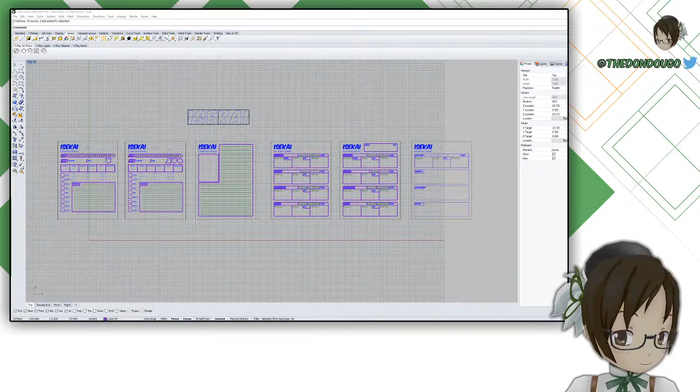So today, what we're doing - first of all, when you saw the title, VTuber redesigns a character sheet, you might not have thought that we're going to be in 3D modeling software, but that's what we're going to be working in today. I'm back in Rhino 5.

If I was doing this any other way, it would probably be in Adobe Illustrator, because that's really good at doing line work. But the program I know best is Rhino.

The sheet that we're working on today is for an RPG called Isekai RPG. It's one I've been working on for a while. We got this nice character sheet so far, but this thing hasn't been touched in probably 6 months. I first made it towards the start of the pandemic when I was hopeful that people would be able to play this game in person. And it has been a hot minute since we've been able to do any RPGs in person.

But regardless, we still need to update this, because man, it's out of date. And actually, what might be cool to pull up is I have made...

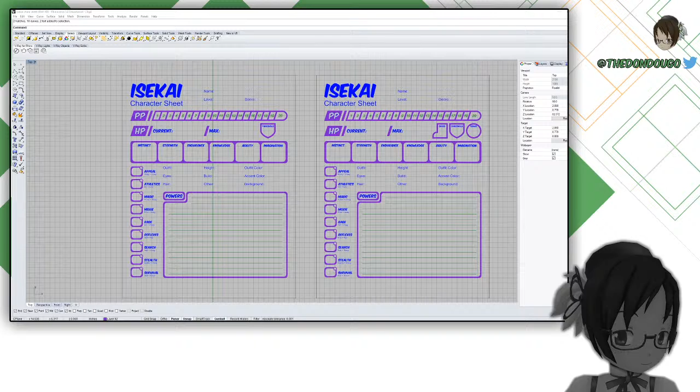Here it is, let's see, and I'll just move this over here. There we go, took some time to load. But here is the actual character sheet as it exists now as a Google Sheet. This is very up-to-date, because it's super easy for me to continuously iterate on this.

So we got this, gonna flip back to Rhino. However, the nice thing about this sheet is, well, first of all, it looks a lot nicer because I've been able to do things kind of however I want. It's just existing on a piece of paper, so I can organize that however I want to. But on this version, you might notice this is a spreadsheet. And I like spreadsheets, like anyone else likes a spreadsheet, probably even more, because for some reason I really like spreadsheets. But that's beside the point.

It's a little derpy because everything has to fit in boxes. We don't have really nice curves, and things can't be placed wherever I want them to be, because at the end of the day, this box here, it's gonna have to line up with everything else I want on the same row and the same column.

So that's what we're doing today. I think some of the big changes are, since we have originally designed this character sheet, we have added a few more systems. One thing that is nice to keep track of in your health is the amount of wounds that you're at.

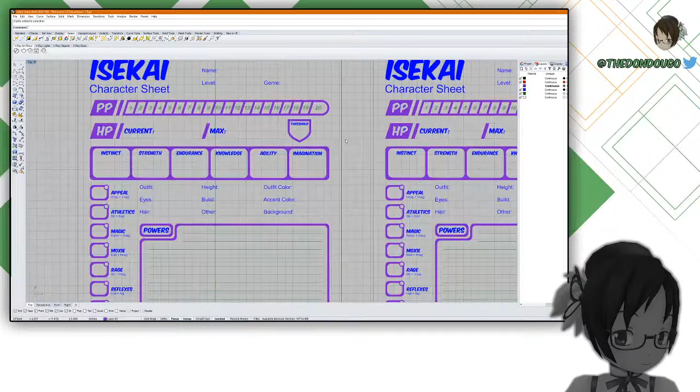Where it's like this solid purple is where it prints out a little more like dark gray. No, I think it's the other way around. Where it's purple, it prints out black, and then where it's blue, it prints with a dark gray. Although, I don't know, it could be the other way around. And then where we have our lines, we also have just a dark gray, so that there's not just black and white - there's a little more depth to this whole thing.

Okay, this is also old because it doesn't have the speed and threshold values. This whole back sheet is just a bunch of lines. The inventory sheet's all fine, honestly. I think all we have to do is mess with our primary sheets here, because these are the ones you generally look for all of your main character reference stuff.

This other sheet on the right, let's see, is this picking up my cursor? Okay, let's make sure that this shows my cursor real quick. Oh, it should. Okay, cool. It says it shows my cursor, so I trust it.

The sheet on the right here is just extra space for if you run out of space on the main sheet, because the whole system is built on this pick-what-you-want system of powers. So there's a lot of things you can take, and it's helpful to have room for that.

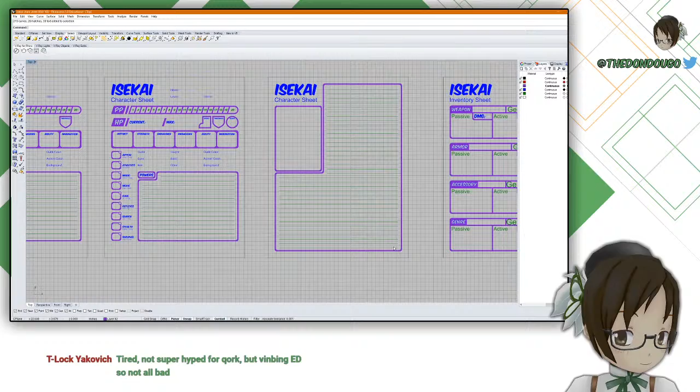Cool, alright. Tired? Not super... Yeah, I saw you're on Elite Dangerous. Sounds like a good time. Alright.

And then, let's see, what day is it today? It's Wednesday already, wow. I guess this is my third stream of this week of streams. So tomorrow's Elite Dangerous, isn't it?

Okay, so let's see, I'm going to make some quick notes of what we need for each sheet. First of all, with this sheet, all this out, we don't need that anymore. Let's see, I'm going to pull up a text.

So for the sheet on the left, we need to add for background and at-level-1 powers. We also need to add wounds. Oh, that's very large. There's a command in Rhino where you can edit texts. Okay, that's just that. Well, we'll just swoop this on down, not that far. Yeah, there we go, that's for this sheet.

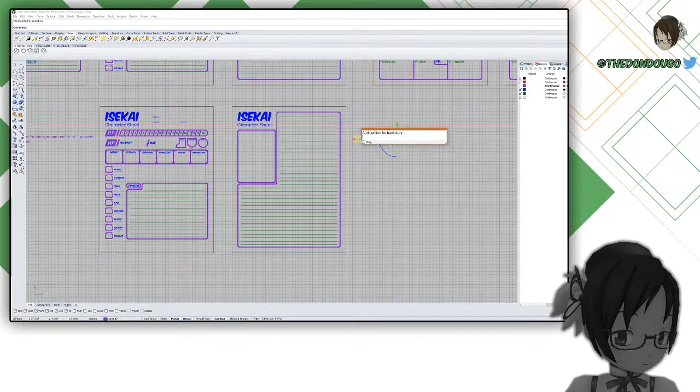And then on the right, I'm actually going to just copy and paste this text here. We're going to say we need to add a section for backstory. And we need to... what else was there? I think, honestly, that might have been it. I'll double check, let's see.

So if we go to the spreadsheet version of the sheet, what else do we not have? This has like different speeds. But my theory is that if you have this sheet here and you have a special speed, then you can also write it down next to here.

It might be nice having a small little notes section actually over here. I'm going to add this. Add a little notes section. And that's specifically for if you have a fly speed or maybe some other threshold power, it might be nice to have an extra section for that.

And then it might also be nice on this sheet, since it's the one where we have all our room for text. As an RPG player, I've often enjoyed having room to actually write down things that weren't necessarily my powers or everything I could do. So it might also be nice to add more room for writing. I'll just say add note space.

Okay, cool, so let's get cracking. First of all, this here's gonna need to shimmy around. The way I could see this going is for the backstory, I kind of want to put it up near the top area so it can take up space like that. But I don't know how much room I'll need to start with.

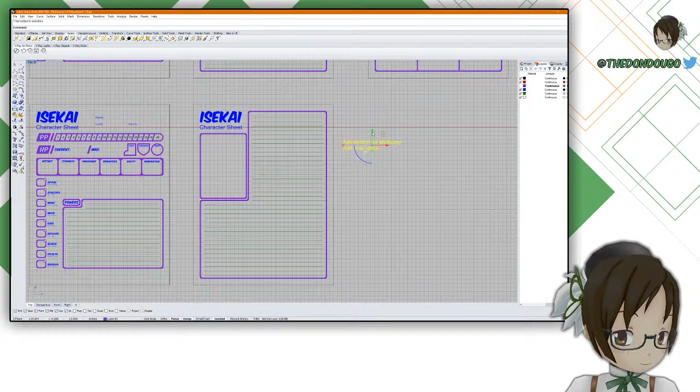Okay, so text. We're gonna just start with that, and then we're going to scale this down.

And then we're, of course, gonna need to space this out a lot. How's that? Considering that this is a standard sheet of paper, that's still pretty big. So we can shrink this down even more.

I guess if I really wanted to be consistent, I could take the size of one of these three things here and make that the size of the text, but these are still pretty large areas and this text is very dense. So we can make it a little extra small.

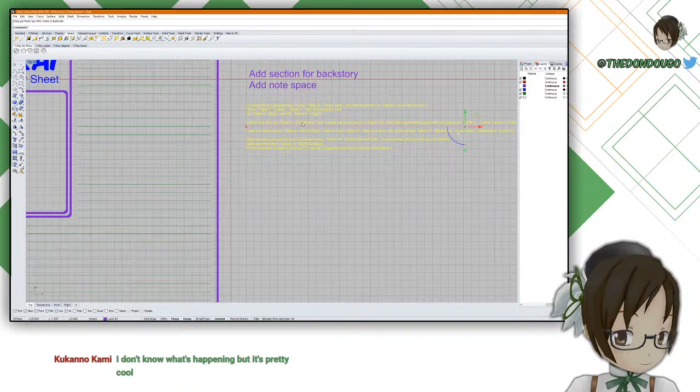Hey, Kukanno. Yeah, we're kind of 3D modeling, technically. We're in a 3D modeling workspace, and I'm working on a character sheet for a Tabletop RPG.

Oh, why does all this spacing look off? Okay, that's a place we'll have a line underneath. This whole thing looks strange. Let's see.

I think maybe I should try to assume... or rather, I should decide how wide I want to make this first. If we do that, then the backstory has a good amount of room to live in. The other thing is, we have a lot of areas where right now it just says Table 2 Colors or Table 5 Build. We want people to have room to write there.

So I think what I might do is... okay, we'll make sure that around each of these we have, let's say, 4 spaces on the right and left. Right now it's just 2. And then what we'll do is... actually...

Because my thought is, we have here on the sheet this little PP bar. It's a resource that you consume to use your powers and all that. Currently, we have these numbers, and they are in our lightest print color, like a light gray. So you can very easily mark over it, but you can still see it.

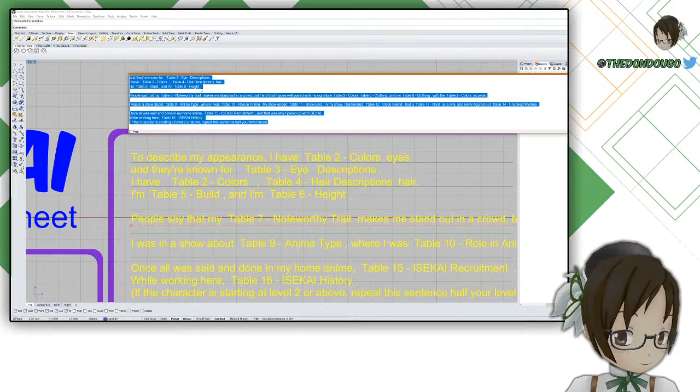Let me back up. So all this text right now is within the purple layer, which is technically layer 2. These are not named, they're just whatever, which is not the best way to do things, but it's how I'm doing it here. This whole thing is a single element within this layer—just a single text element that has all this text within it.

But if I want to have, say, Table 2 Colors as a different object, that needs a different color or different lightness, it needs to be on a completely different layer. So...

I think actually what I'll do is, if this is all black, then instead of having... I'll keep a placeholder for now, for every time we have one of those, because I think this will actually end up being a little more complicated than I want it to be. But that's how it is.

The other thing is there will be a line underneath. I think we could just build the underline into this. That makes a nice dark line if this is our black or dark gray. Yeah, okay, I'm a fan.

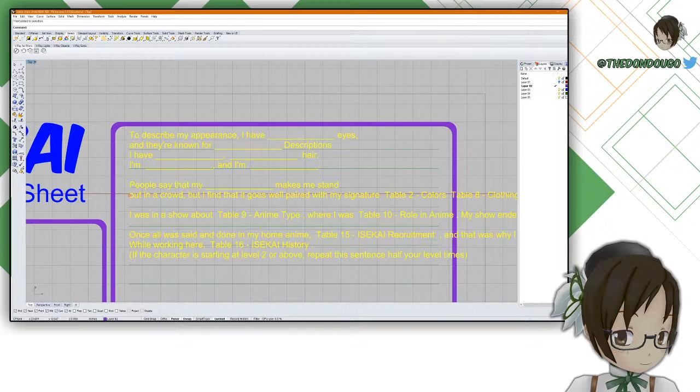And out in the crowd. Wait a second, and they're known for something... descriptions. I think that's not supposed to be there. Yeah, descriptions, so need to take that out. Oops.

My signature. Colors, 1, 2. Clothing. And my... blank. That's a good place to put a new line with the blank accents.

The funky part is also, I used a very specific offset for this and a very specific fillet wherever I had two lines that met, like all these corners are rounded. And I'm gonna need to figure out what those were, because I actually don't know the best way to find that.

I was in a show about blank, because this RPG is about going into other anime shows and fixing them, and you yourself are an anime character.

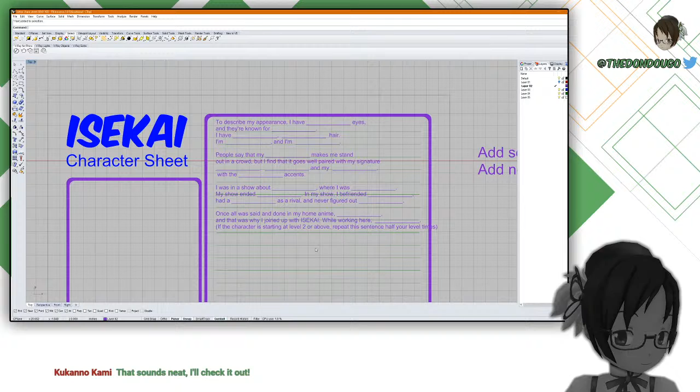Let's see, I know Dice Queen D, I think, was the person who started it. So if you can find her on Twitter, you could probably go back through the post and find a link.

The main thing is now this is taking up a lot of vertical space, so it might be better to put it down here below the little character portrait. At the same time, I feel like it's nicer to have a lot of horizontal space to write.

But yeah, in terms of sizing, that's just pretty small. And I feel like if we make this too much larger, then it'll just take up way more space than it should.

Design decisions, have to make design decisions. And that's not always fun.

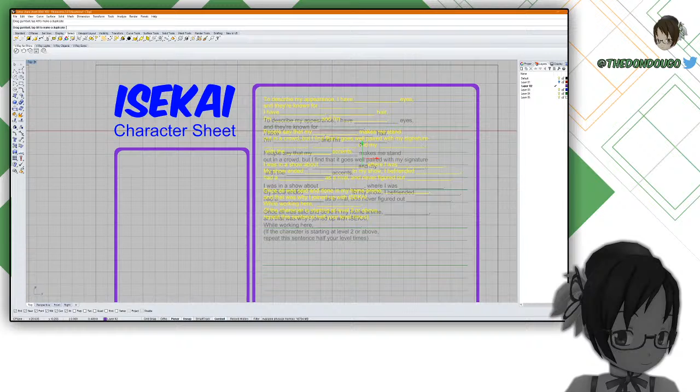Let's see, for now, we know that we want this to be on the... I want to say this wants to be on the purple layer. Guess we can always, like, we can actually always figure out what this will look like.

If you just use the print... no, I think I need to first zoom in on this dot, because Rhino, what it does when you hit print is it centers the thing to be printed out over your view in the program, which is okay sometimes. If we type in print, it should pull up this guy, and then the scale we set back to 1:1. We make sure that the width is 8.5.

Oh, I hit enter, I didn't want to do that. Let's try again. Print. Yeah, okay, so you can see that now the thing is centered. And then you hit output color to print color. Okay, yeah.

And then let's zoom this in. The only way I know how to do that is just by changing the scale. Yeah, so can't really get a good view on it because I'm not over it, but I can zoom out again and zoom back in on the text, and we can see that it is like the gray. Yeah.

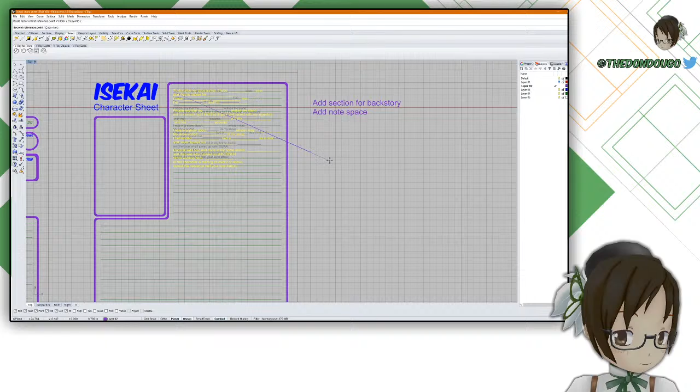It's a little like that. And then we're going to select all of these green lines, and I'm going to hide them for now.

If I really want to make this look a little nicer in the display to see what it might look like, I can go to my display options and set the background to white.

Although now some of the green lines get hidden behind the grid. I'm pretty sure I can actually turn off the grid. Let's see.

I just hide the command, because technically the clipping plane. Wait, clipping plane? No, it's something plane. Wow, it's been way too long since I actually did this.

Other option, just click it. You drag it off the grid. Wow, and that's what it looks like.

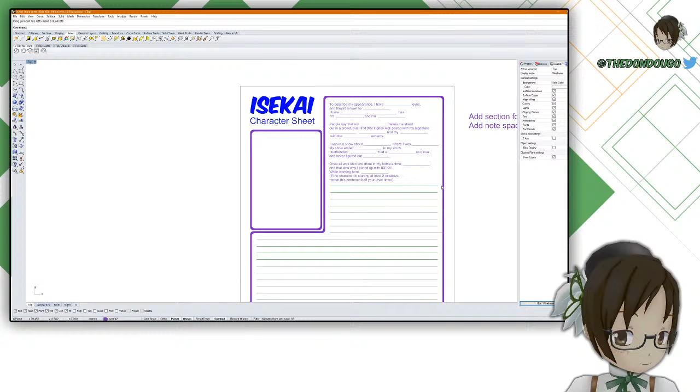Which isn't bad once we break this up into its own box. I think that'll work. We'll test that for now.

I'm also just going to move all of this off of the grid so we can see how things will look a little nicer, a little better.

I don't know why, but I cannot do words today.

Okay, so next thing, I have to figure out my spacing. First of all, for distance, going across there, 0.06 inches.

Okay, go to our purple. We're going to make a line. And we're going to figure out how much spacing we need above and below the text.

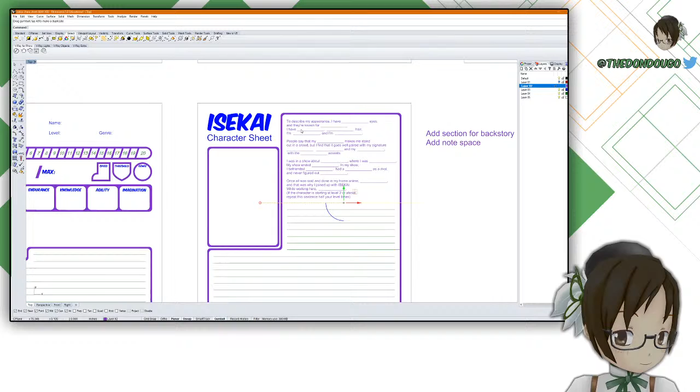We want it to be about symmetrical, and I think that this height above the text to the purple box line thing is the same height as one of these, because I put the text on one of those lines, and also just like looking at it, that looks all right.

And then we're going to offset the distance being 0.06 inches.

And then, yeah, you can see that these two thick lines compared to the white space in the middle, they're all the same width. And then with this here, the proportions are like square. If I drew a line from this corner to this corner, that would be a 45-degree angle.

So I know that that's what I'm trying to get. Now I copy this. What I'm gonna do is I'm gonna click there, and I want it to be...

Okay, I'm not gonna do it that way. I'm gonna make a line with a length of 0.06 inches. And then I'm gonna use that as a spacer for this here.

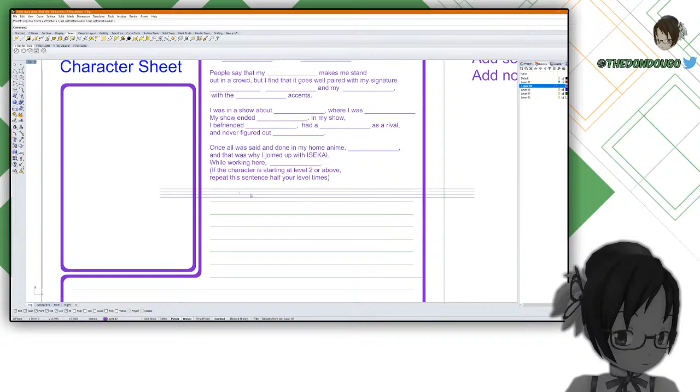So now we have a bunch of these purple lines that are all nice and spaced out. One thing is we have a lot of extra green curves. I'm going to delete this one too, so that there's a lot of headspace on this first line that you can write on.

Yeah, the next thing, so I think this here is a hatch, which is like a filled in area between curves. Unfortunately, I think... actually, no, we might not have to delete it. I'm going to delete it anyways because we're going to rebuild it later.

But we're going to break out our trim commands. So first of all, let me restart this. We're going to select all these.

So now every line that we've selected, when we have the trim command, if we click on something, it'll use these lines and trim out what I click on regarding the bounds. I've never had to think of how to explain the trim command. But basically, here, let's restart this.

I'm going to select this, trim. It's now going to use this line as a cutting object. So if I just select all these other lines, it will cut them off because they intersect this line. That's how we're going to explain the trim command.

You can also use it to select multiple objects, and then you can select the things that you've also selected with the trim command, and I can't really explain why, but it just works. So now we have nice clean edges.

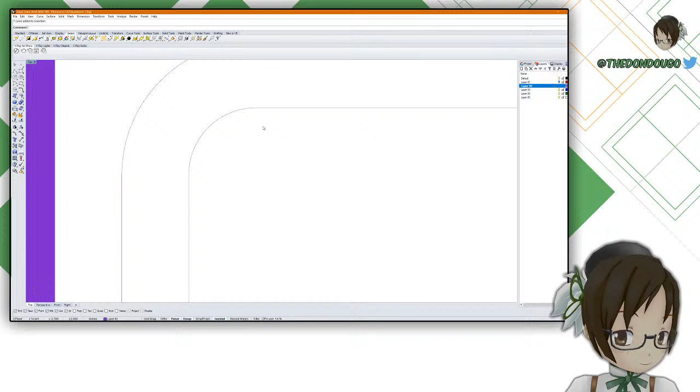The question is, do I want to actually redo every curve? Because on the other hand, there is kind of a charm to having the slightly thicker corners. At least I think there is, because it just appears to be thicker due to the different radii.

For the sake of my sanity, I think I'm just going to do everything with the same radius. Let's fillet these, click these. Everything must be filleted. And the next thing we need to do is join all of these curves together.

Because currently, this section that we just added is different than this curve, which is different than this curve, which goes all the way around here. So we need to join them together so that they're treated as one curve.

And I forgot to fillet this corner, but that's fine, you can just do that and it works. Then go back, join all these lines together. That's a curve, that's a curve, that's a curve, that's a curve.

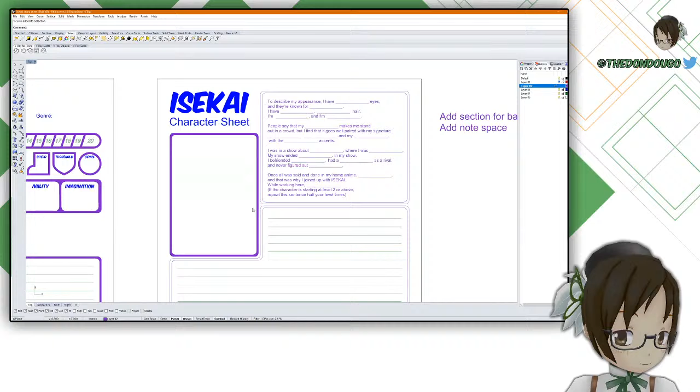Cool. Next thing is we're going to regenerate this hatch. So what we do is we do the hatch command, select our two curves, and it fills in the space between the curves. Usually with hatching in architectural drawings, you might have something more like... that doesn't look right. There we go. Let's do this. And then we're going to turn down the scale so it shows a little better.

You use hatching as a way to fill in volumes between lines with hatching lines. Usually these have meaning, like certain hatch patterns mean that this is made out of concrete, or reinforced concrete. But I'm just using it to fill everything in, because it works when you use the print command, and it prints out nicely.

Okay, that's nice. Next thing, we have these labels for just about everything on this sheet. We actually don't have one for the backstory. And now that I'm looking at it, most of the space is in the bottom right corner. With everything else on this sheet, I think it generally tends to be on the top right, like for powers here - that's on the top right of this box.

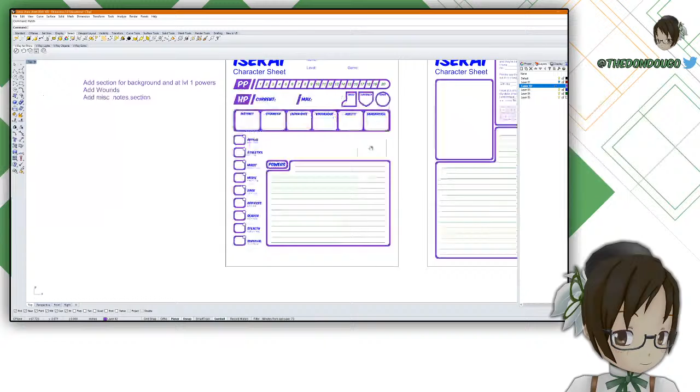Alternatively, we could sneak something in vertically, maybe? I kind of like the idea of putting it in the bottom right, though, because we can do like what we had with powers here, where we have a separate box, spaced out, but it still looks like part of the same box. If we draw a box there, you can see that the little powers box fits within this box, and I feel like I'm rambling about design things that I don't fully know how to describe.

But that's how it is sometimes. I usually don't talk my way through these processes, and these are things that have been just kind of built into my head at this point. I'm pretty familiar with what I'm doing.

Okay, another question. If we put a bounding box, which will build a box around our text, I have a feeling... let's see, what is it? Can't remember the command I'm trying to use. Distance - the distance between the text, no, not the center of the text, and this line here, I have a feeling it's going to be just about the same as every other spacing on this model. Yep, 0.06 inches. Cool. Is this text?

Cool, that's text. I'm just going to copy this and have another version over here. We're going to change this to backstory.

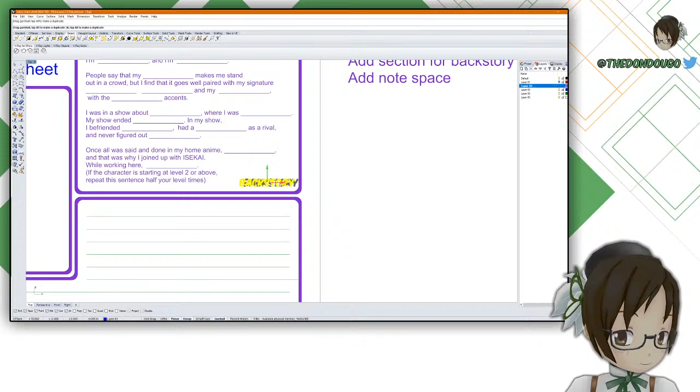And then what we want it to look like is have the whole box in this corner, so that you can see that this big box here is for the backstory. So what we need to do is bounding box it.

And then we're going to offset the curve of our bounding box by 0.06, which we already have. Now that's the spacing between the text and the interior of the box around it.

Then this here is the actual box around it. And what I'm going to do is move this here, that there. So now it's lined up with where it would be in our box here.

So we don't need the bounding box. And I'm going to actually get rid of this hatch again, just so we can see what I'm doing here. I'm going to fillet these edges.

Wait a second. Okay, now. There we go. So this is like the little backstory thing with the box. I forgot to hit the top right corner. We're gonna make sure we get that.

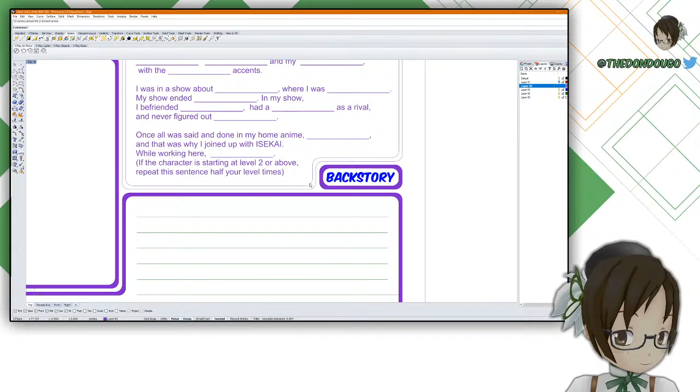But I kind of like it here, because if I was drawing out these boxes, it would make sense that the corners would be where the thing is darkest. And I've just gone over it with the join command. So we have these again. Gonna hatch. And there we go.

Another nice thing about this is we have this little clause here, like if the character is starting at level 2 or above, repeat this sentence half your level times. It's not really part of the backstory, it's just a mechanical thing that happens to be part of the backstory. And that almost lines up with this little cutout here, so it's just a little note, but it's not important to the backstory itself.

Actually, I like that so much, I'm actually just going to take this out. Shimmy this on up.

Hello, welcome. Today we are not actually playing any games. Okay, I'm just going to redo this to say what I want it to. There we go, because I'm going to slap this down here. Okay, that's too small, but that's fine, we can just scale it back up.

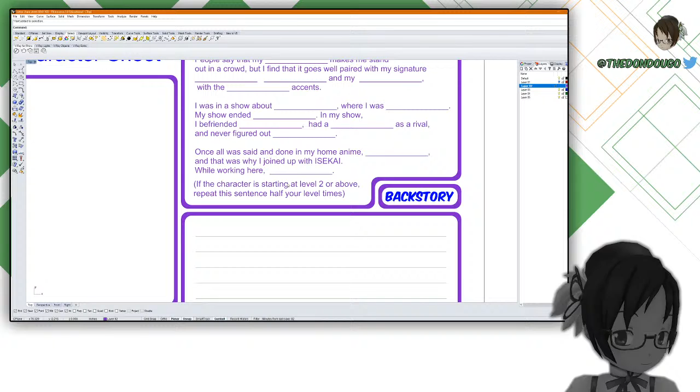And now, yeah, there's that little bit of space, so... Oh, that's interesting that I haven't actually thought about before. On a paper sheet, you don't have more room to write this on. Like if I actually was starting at level 2 or above, I would write while working here, yada yada yada. But there's no room for me to say while working here again. That's... I've never thought of that.

And if you're working on the spreadsheet version of this sheet, it's pretty easy to just add more commas, more things here, because it's all just a text box, and there's plenty of room because it's super horizontal. But on this version, there isn't as much room.

Yeah, I'm actually not sure the best way to handle that. I could see one way is expanding the while working here, just adding more space, basically. Just this whole thing at the bottom is just a bunch of blank lines. Theoretically, the game goes up to level 12, which means at most you'd have 6 things to write. But that's also one where really this whole thing, where it's like while working here, this should be an extra large bit of space to underline, because you're writing sentences.

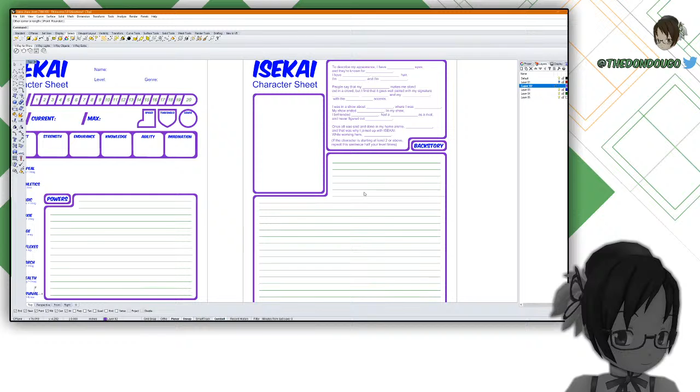That might not be a bad way to do that. And I do like the idea of this going across just being its own box, because then it's just a field of rectangles. And while it is nice to have these weird shapes that wrap around, almost like an L, those are cool, exciting shapes, but at the same time, maybe it's easier to be organized with a bunch of rectangles? I think.

Maybe we take a break on this sheet, we go back to this sheet. So one thing we need to add, now that we have all this space here, is we have powers, but back on the spreadsheet version of this character sheet, we have like at level 1, background, tropes. And that's because these are mechanical things that you get for your character. At level 1 is just whatever things you pick up as a character at level 1. Because every character comes from a genre, they're all like characters who used to be in anime. And you get certain things if you are just a character of a genre, like that's where you get skills you're experienced with, things like that. And so it's nice to have a little box there.

Background is actually how you generate these protagonist points, PP. And then tropes are things you get as you level up other than powers. If you go and focus a specific archetype of character, you pick up tropes. Okay, so that'll be the next thing. At level 1, background, tropes.

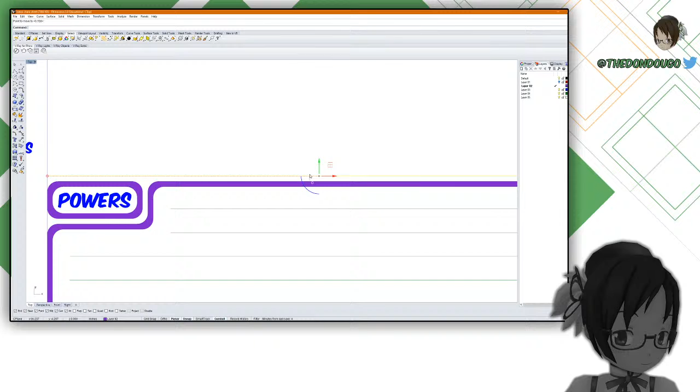So here's what we're going to do. First, we're going to need lines, a lot of lines. We have our horizontal ones going across to give us reference spacing. We're going to make a line that's 0.06 inches, then mirror this across and move to there. That gives us our size reference.

I'm going to build a box across there. We offset it like that. That's all the room we have. Now I can clear away these other lines I made.

So we need to break up this box into 3 boxes. There are some pretty funky tools I have available. One thing I could do is divide this curve into 3 sections, which places points to break the line up evenly into 3 sections. That's not quite what we're looking for.

I'm almost thinking if we have the first 2 boxes, what we could do is break this up into 4 segments, and say the first 2 things, our at-level-1 powers and our background, just get 1/4 of this area each, and then the tropes could get 2/4. That's not a bad way to do things.

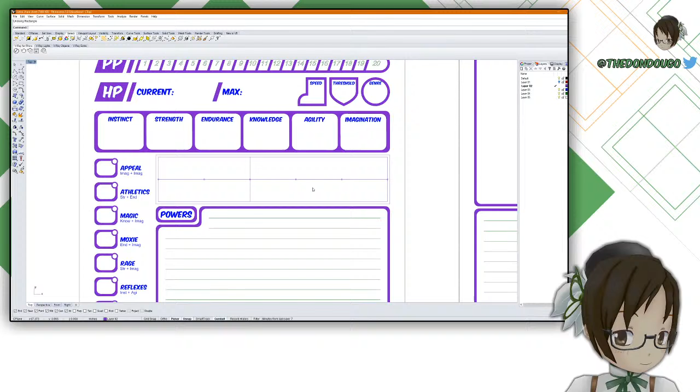Make a line. What we do is say that the background and at-level-1 feature gets a horizontal box so there's more room to write in, which makes a lot of sense to me now that I think about it. If you're writing things, we write horizontally - if we have a square, it's not the most convenient shape. But then tropes could still have all this room here to work with. That makes sense to me.

Now in terms of the proportions, splitting things up into fifths isn't particularly bad - it gives tropes the room it needs. However, I also see there's this one line here between our main 6 stats, and we could use that as our vertical spacer. So instead of having an actual nice proportion, we just use a pretty arbitrary proportion, and that's not always a bad thing. It means I can delete these.

Now the question is, how do we split things up vertically, and do we also have a gap? What I mean is, offset this 0.03 on both sides. One way to do it is, instead of having an actual space between these boxes which takes up a lot of room, we could just draw a line across and have at-level-1 and background be their own box, or have this as a whole be one box but with some lines in the middle.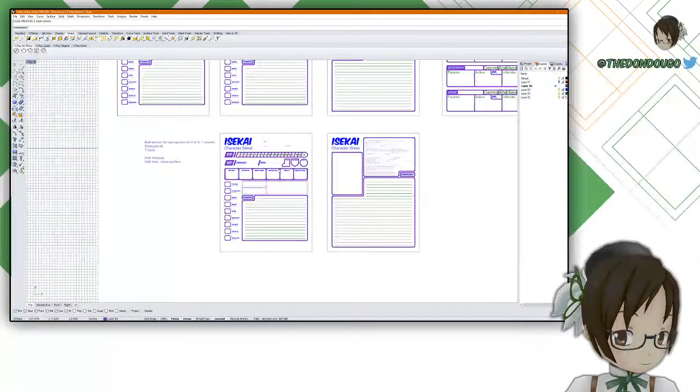It's not the same design language as we've been using for the rest of this. Actually, no, I take that back - we used that for the whole inventory sheet. And if we used it there, I think we're fine doing that on the main character sheet, even though it looks a little different - how everything on the character sheet's very bubbly and independent, while this is a very big, heavy, segmented box.

But at the same time, if we break these into their own boxes, they're going to take up a lot of space. Okay, I think we're going to give that a try. 1, 2. We'll see what happens. We're going to trim that, trim these, trim this and this, and this, and this. So it looks something like that, plus all the many fillets.

Another thing I'm thinking is, for example, when we have - I like this font size, so I'm going to steal it. So this would be like, what, at level 1? We also don't really have much room to do the individual bubbles that everything else has.

Then we're going to have background. Yeah, because we want enough room to write in this, if we have these big thick lines, it's just going to be very dense, and we're taking away room to write. Take away the colon, maybe - semicolon, no, colon. Okay, cool. And then on the right, we would have tropes.

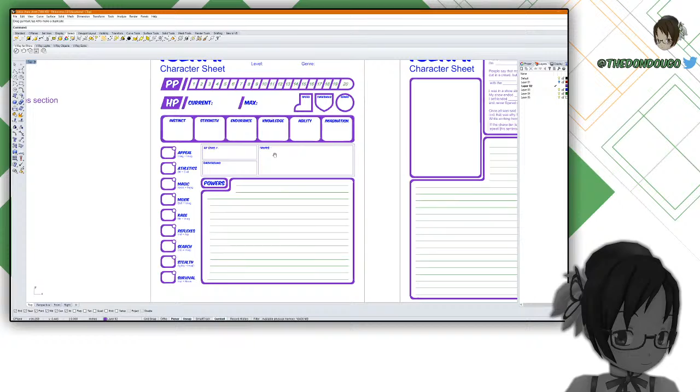Yeah, that looks about right. The thing is, the box for tropes, while we do need room, we don't need this much room. So with tropes, I could see splitting into its own big box. The main thing is, right here we have one line between endurance and knowledge.

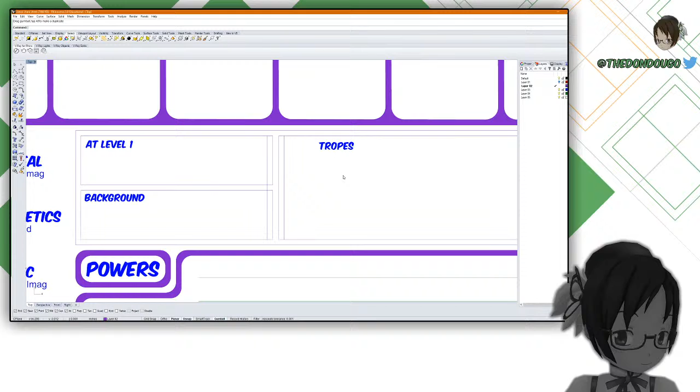What we could do is break level 1 and background into its own box, and then tropes into its own box. Or we could have these all just be in one big box that's broken up into 3 chunks.

And here's what we're gonna do. We're gonna design both of them, and then we're gonna see which one we like. This is like a weird way of basically having a branch in a repository. I just build a physical thing. I think I did all the same over here.

We can actually see the slow development of the special boxes. I think here what I was testing out is specifically for the skills, how to design that. So I had some where it's like the things in the bottom right, top right. What if it was offset? And we get these cool little bubbles, which is what we settled for.

Except here, I'm going to be testing with these things. Okay, I think first one I'm going to do... I'm going to undo that. I'm going to work on this one first. This will be the one as we originally thought it: 1 box.

Okay, so we're going to first join all of our lines. And then we're going to fill the hell out of it.

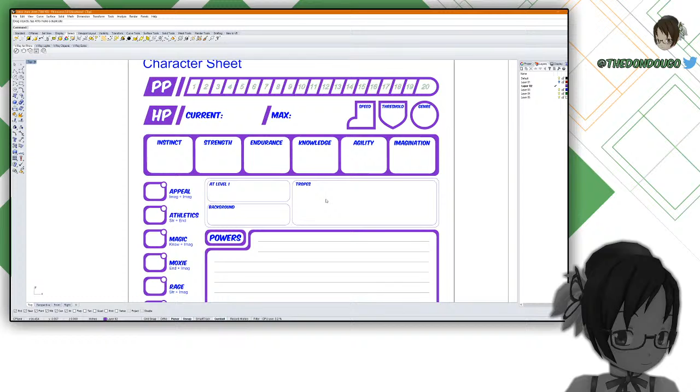Okay, so that's what that would roughly look like. At least it's one possibility.

I might also do another version where we have tropes in its own box, because we have room for that. The main thing is tropes could even... Yeah, okay, so I'm going to make another version of this real quick.

What we're going to do is... let's take this size. Bounding box. We have line, 0.06 inches.

I'm going to shove this into place using these lines I just made as little spacers. So that would be the size of the... Yeah, that's the offset, that's the box.

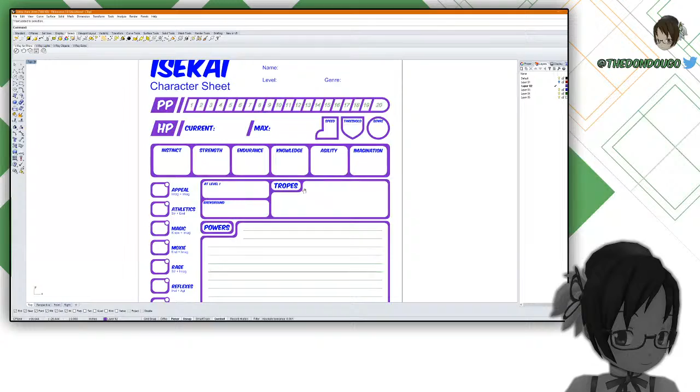Then we're going to join these together. And when we select all of these, we hatch it. That's what that would look like. That looks pretty icky. Oh, also, that's not supposed to say powers, it's supposed to say tropes, which is longer than the word power. Actually, wait, O-W-E-R-S, never mind, they are the same length. I still don't like it. But it's nice that we actually made it so that we know we don't like it.

Next one. Actually, wait a second, I don't know if that's actually spaced out correctly, but I know this is. I'm going to delete these two lines. Offset that, offset that. These lines are a little short, so we're going to scale 1D.

Just to fix that. This is what it would look like, right? Technically, those would expand out, so let's scale 1D those. And since we're selecting from the midpoint and we're scaling in one dimension, it works both ways. Usually if you're just scaling from an endpoint to another endpoint, scale 1D won't matter much, but if you want to scale it equally in both directions, you just select from the midpoint.

Then use this, this. Oh, there's different lines. Cool, we can get rid of that one then, we already have that line. Trim.

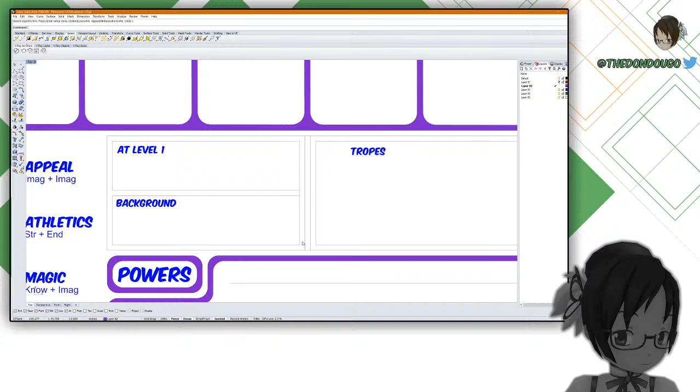The music in the background now, I don't really know what it is. It sounds like bicycle horn music, but it's still kind of chill.

That would be having two separate boxes. I think I like having tropes be like small font size, because it just looks nicer. So we're going to keep that.

We're going to move all this to the corner where we know it lines up. I should also do the same thing with this, just to make sure it's lined up, which I can clearly tell now that it is not, but that's an easy fix. I don't know why we're using 0.06 as the dimensioning for everything. That's something that's just been lost to time.

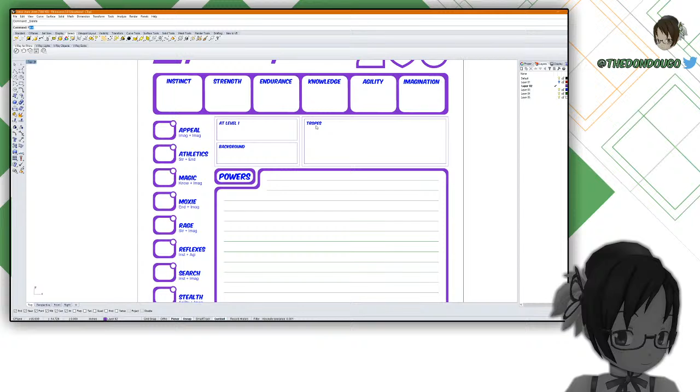We got level 1, background, and tropes. Now all nice and pretty. And now we fillet everything.

It also helps because, like I mentioned, it's an anime-inspired RPG, and so the font I'm using is called Komika Axis, and it was actually developed to look like the lettering used in American cartoons and comics. And so that combined with the kind of darker corners, I don't want to give this necessarily the look of being a manga or whatever, but I do want it to look maybe a little like that.

Join these all together. Going to hatch that, hatch this. I think that's nice, gives you room to write.

Maybe for tropes, I could see it maybe having the different lines, because there's supposed to be something there for, like, 3, 5, 7, and 10, I want to say. Yeah, 3, 5, 7, and 10. Let's see, 1, 2, 3, 4. How well does this fit? You can kind of squeeze 4 lines in there. So I think I will.

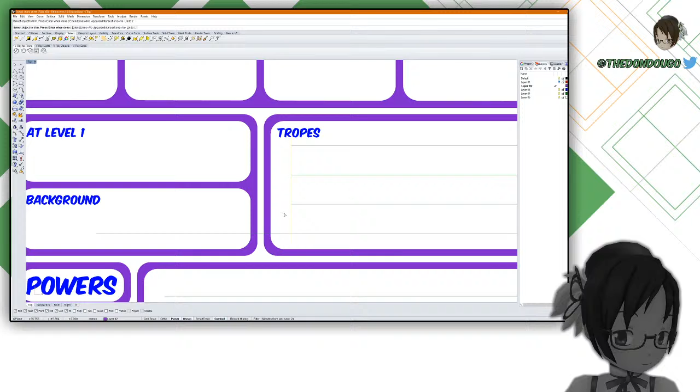I guess that because that would be triple the length of the gaps between lines, so basically the same as these 3 here. But it looks like it might have actually been arbitrary, I might have just eyeballed it and been like, that looks good. So tropes would look like that.

I'm not sure I like that. I like tropes being at the top left, but I don't like these lines. Alternatively, if I just leave it like unlined white space, that might be the way around it, so that you can just write what you need in the space that you have.

Yeah, okay, maybe I'll do that, because also that just looks nicer if, like, at level 1, area, background, those are all just going to be white space. So it'll blend nicely if this is also white space.

Whereas powers, it would be really weird to have so much white space. I mean, technically it is white space because even though we have all these lines, they are super light, so you can write over them, and you won't have to worry about it. That's actually a good argument for having all the lines in tropes, though, because even if you don't use the lines, they're there if you need them.

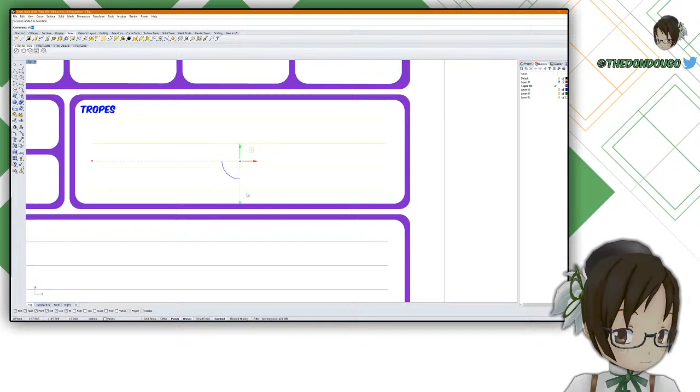Okay, what's this space here? 0.13. Okay, let's see. 0.13 inches, a little over the spacing of 2 of these lines.

Move that straight down, delete that, so that's spaced. And I mean, see, the thing is, if we didn't have the word tropes here, this would look great, like, wow, that looks so clean, but it's just a box that doesn't say what it's there for.

One funky option that I'm not sure I'd even be a fan of is doing text this way, or would it more likely be like TROPES.

It'd be spaced like that. At the same time, that does fit the overall form of this better. So if we had like, what would it be? .06 inches. Something like that. And then we have room for the actual title to breathe, and there's plenty of room to write it, and then you can have like 3, 5, 7, 10.

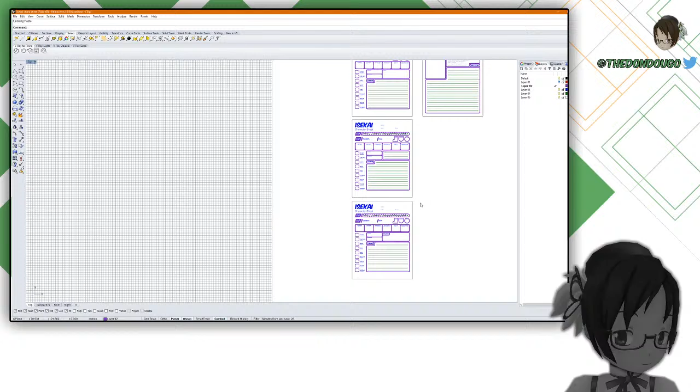We're going to shuffle these around a bit. I think what we'll do is we'll have this off to the side here, and then we'll just keep branching down. This will be like there. Paste that there, and then this will be our next iteration. I like to just have the complete history of what we've done, kind of laid out. Makes it nice for my record keeping of what's actually changed with the sheet.

Okay, so next thing. TROPES. Have this here. The thing is, I don't like the vertical spacing on this. Like, honestly, it's not bad. I'm just being a little picky.

Bounding box. Offset. What I'm going to do is select all this, select move, and this midpoint should line up with that midpoint. And then that's all the area we need around it.

What we do is we have a line that's 0.06 inches. Make sure snap smart track is on. What this will do is it means I can put a point here and Rhino will be able to just draw vertically from there. Sometimes it can be very annoying, but for this, it's actually helpful.

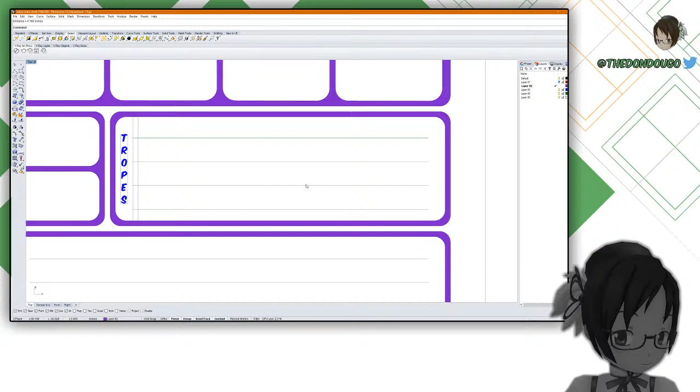This line here will be the actual vertical line. And then, what was the spacing here? 0.19. The distance is 0.19 inches. And that's our trim for that there. Not sure why it is, but I just accept that it is.

Okay, so what we're gonna do, get rid of this hatch. Trim. Join. Fillet. Oop. Ooh, there's not enough space for it to fillet. Interesting. Let's see if I undo the join, will it be able to work something out? No.

In which case, what can we get away with? Well, that's pretty easy to find out. What we do is we just explode the fillet. We know that this is basically part of a circle. We're going to make a circle. We're going to make it a, what is it? I think 2-point is where you just draw the diameter. Yeah, so we're going to do that.

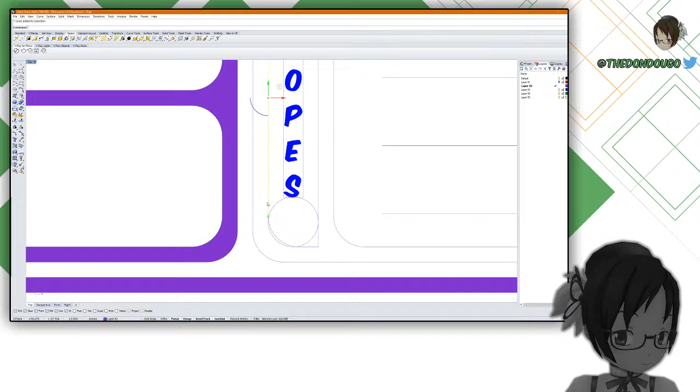And then what we're going to do, we're going to move this top point, no, it's like a circle, to where it would be if it was on this line. And there we go. Now we get the fun part of getting to jank a box together out of these. Mirror it around the center. And honestly, I might as well just delete everything that isn't the circle. It'll be a little easier that way. And it just kind of works out. The text happens to be right on the edge of those circles.

Very nice. Not sure what that means, but proportions. I think I can mirror that around the midpoint there. What we do now is we select these lines, trim, trim. And from a distance, that looks okay. If you go up close, you know that mathematically, these are not the same. And even looking closely, you can see that that curve is more than this curve. But I'm fine with that, I think.

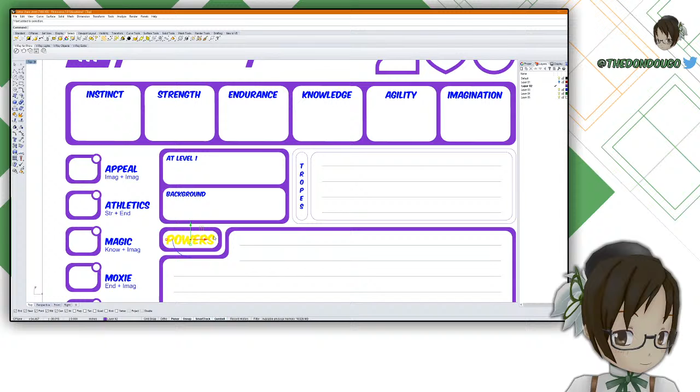One more version I think I'll do. Just before we finish that up, I just want to double check something. And that's, right now, the tropes is using the same font size as at level 1 and background. I was going to say, what if I use the same size as where it says powers here? I think that's actually just going to be too big. So we're not even going to try that.

Okay, so what we do now, we select all these, join them together, and hatch them. That's not bad, actually. It looks a little cluttered, but it's not bad. And what we can do, we can even have this rewrite to say like 3, 5, 7, 10.

Ooh, I don't know, kind of like them centered. So we're going to make a bounding box, and we're going to make sure that from the midpoint, which I think is here, yeah, 0.06 inches. Where's the midpoint? There we go. So now we know that the text is centered.

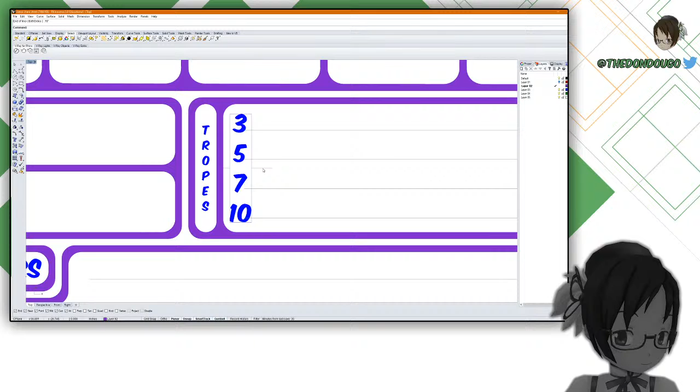And then what I might do is, what was that distance, like 0.19 inches? Nah, let's not do the same thing here. Let's just do these.

It's a little janky on the 10 because it's just wider than everything else, but I think that's nice. Now you have your tropes for 3, 5, 7, 10. And let's see - tropes, 3, 5, 7, 10. And you can only ever have one trope per tier. I'm pretty sure there might be an exception somewhere in the game because I feel like there is. But that's good. Make sure to save. Save to my desktop. Cool.

Alright, so that's the tropes, that's like level 1 background powers. That works, and I think overall it works together. That was a productive little detour. Maybe where it says tropes, it's still a little weird. I might do a quick spin off of that real quick.

What we're going to do now, we're not actually going to use text, we're going to use something called text objects. First of all, we're just going to say TROPES, then I think you can technically just explode that. And there you go. Now, instead of being editable text, it's just an object, these are just curves.

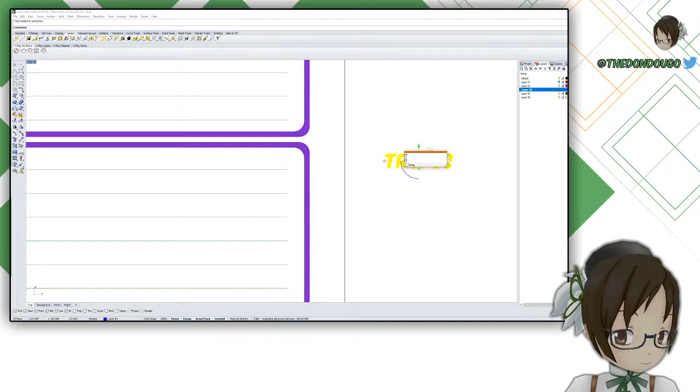The main difference - I'm going to undo all this because I realized I made this a little harder for myself. What I should do is type TROPES, then hit explode, then hatch. Because now what I can do is basically bounding box each individual letter and work out a spacing between each one.

Gonna bounding box these, and you know what better distance to use than 0.06 inches - we use it everywhere else, so might as well just keep on using it, right? I'm gonna build out all these lines so I can move. I'm gonna actually start from the top and work down.

That didn't look like it lined up correctly. There we go. This is what I learned 3D modeling for. I learned it for being able to do this pretty easily, right? It wasn't how to learn how to model buildings, how to model text.

And then I'm going to bounding box this. For now, I'm going to turn this into a group. So now all this text is like one thing. If I click anywhere, I move it - it's not like if I click one line, it does something weird.

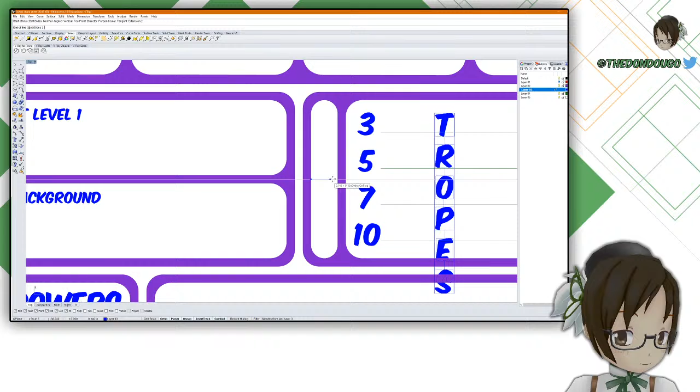Okay, so now we're going to delete this. Need to find the midpoint here. Line it up on the midpoint. We're going to use a full scale command, not scale 1D, just to see if I can make this fit nicely.

What I should really do is line on the top and say 0.06 inches. Join that. Then scale here, there, get this to where the line on top lines up with this line here.

And then last thing to do is put this squarely in the middle of this box, which I also happen to know that this dot here is the center of mass for this entire thing. So if I just line that up on the line, boom - wow, that actually looks pretty nice.

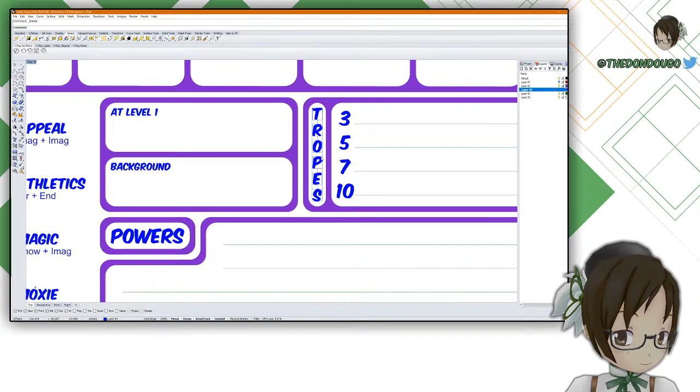So we're gonna ungroup, select everything, unselect, try again, select everything, ungroup, deselect these, then delete. So now we have this tropes versus this tropes.

And now we have to decide which one we like more. Honestly, it's a tough call. The nice thing about this one is the spacing is about 0.06 inches from the side of the text and at the top and the bottom. It's also a bit large, which is one thing I like about this smaller thing that says tropes. But I also know that this will be easier to read. So I think I'm going to go with this one here.

Yeah. Yeah, I like that.

Next, one of the things we need to add was wounds and maybe miscellaneous notes. Miscellaneous notes, I don't think I'm going to add. But wounds is a status effect where every turn you take X amount of damage until you have it taken out. So what I have on the version here is wounds right next to hit points, because if you have it right next to your hit point value, it's very easy to remember that you have the wounds. Whereas if you just had to write it in notes somewhere, that might be a little difficult to remember.

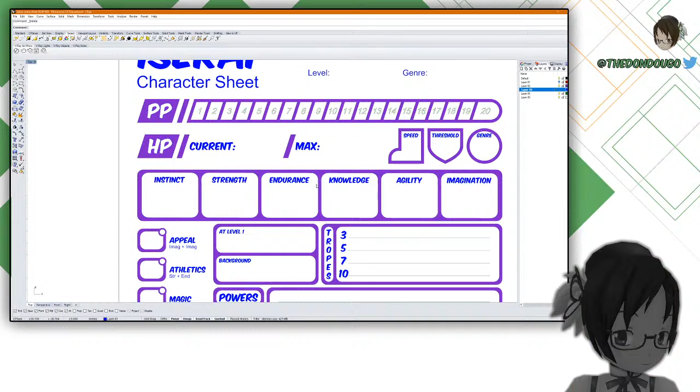The downside is that this looks really nice right now. This layout, it's just so clean and so nice.

So where to put wounds? I guess if I did have a miscellaneous notes area, you could have a little box specifically for keeping track of wounds. Where to put it? I could put something over here by where there's speed, threshold, genre. The thing is, this spacing between here and here is pretty nicely thought out, and I might want to shimmy some things over.

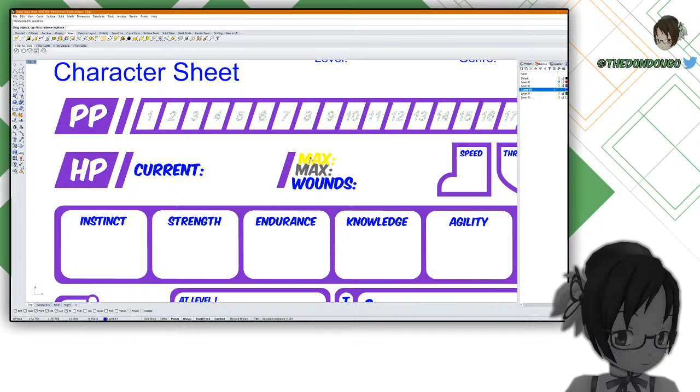Alternatively, what we could do is have hit points current, and then max, and then wounds. Almost like that, maybe? We'd work out the actual spacing, but somewhere where you can clearly see, because current makes sense to be on its own, whereas maximum hit points you don't change much, so you probably don't need to reference it as large a number as your current hit points. And wounds is also something where, I don't know, maybe that'll work.

I do like how this version on the left is so clean, and I really like it. But at the same time, you do need that information. Okay, what if wounds was just smaller? Wounds on the bottom, max on top, a little bit of gutter space between each of them. But roughly have these boxes line up on the side. I'm in favor of that. We're gonna do...

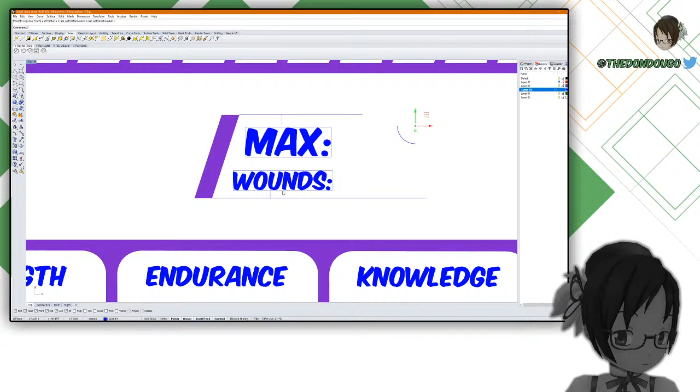Start by making bounding boxes. I'm just gonna go ahead and make a line that's 0.06 inches, just for size reference. Go ahead and copy this here, and to the bottom here. Want that to be there. This to be here. We also know that we want the bounding boxes to line up on this side, so I'm going to go ahead and move that here.

And then how far away do we want it from the diagonal? Just want to check something. Okay, so the current thing has not quite one width away from the diagonal. I'm going to fix that. Put that where the C just touches. Yeah, there we go. And then move these to where it just barely touches. Well, maybe not with wounds, but it's close enough.

Then delete all these lines. And that looks pretty nice. At least, it's organized.

If I really wanted to, I guess what I could have done is... I know that there's, like, an inherent diagonal. Well, I say inherent diagonal, there's literally a big one that's, like, here. What I could have done is organize these to be on the diagonal. But at the same time, I think maybe it's nice just having things lined up. Although admittedly, having them on a slight diagonal does play to the strengths of the font. It's like the font already has a diagonal built into the colon here.

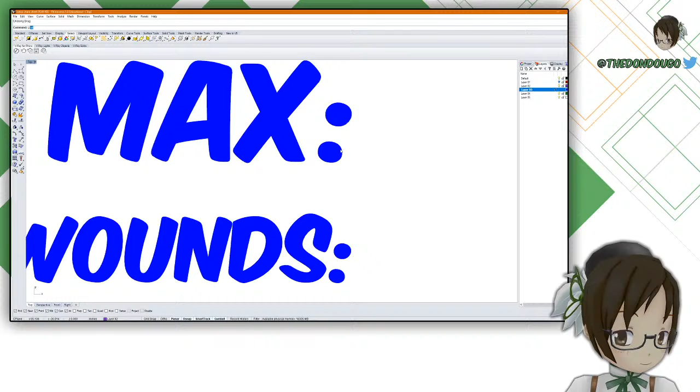Okay, so you know what? I'm gonna circle, 3 point. Given 3 planar points, there's always a perfect circle. Roughly, the font itself is not perfectly circular. I can do this, I can find their midpoints, and from there... oh, the second one's smaller. We're just gonna eyeball it. That looks to be about the center. That looks to be about the center.

Scale one dimensionally. And that would push wounds from there to there, which I thought I would like more than I actually did. I don't like that, so we'll just keep it as it was.

Cool, so I think that's good for this sheet. It did break some of the cleanness here, but I think it works. I guess if I wanted, I could make the max the same size as wounds. I don't think I would actually gain much from that, though.

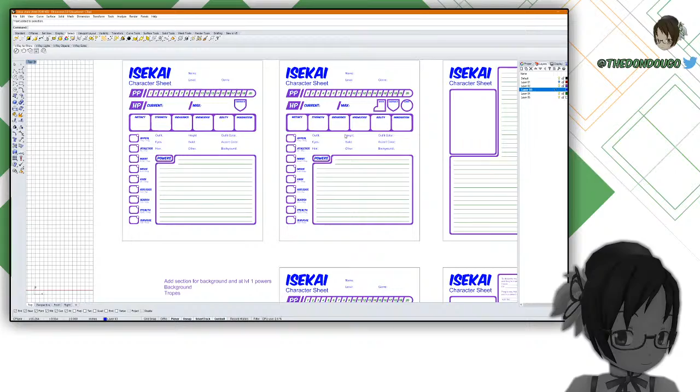Okay, I think that's good for the front sheet. I had a note of maybe we could add a miscellaneous notes section, but I don't think I'm actually going to do that now. I kind of like this, though it's definitely gotten a lot more cluttered than how it originally was. One nice thing about the old sheet is these were just floating text options.

Which kept this open area clean, and it had a very clear distinction between this heavy top bar that just had all your stats that you need on quick reference, and then the powers, which were nice and spelled out for you. But this sheet does have a little more information density.

Okay, I like that. Next up, we hop back to this. What did we want to add here? We could also have miscellaneous notes here, honestly. What we could do is just literally break it up like this.

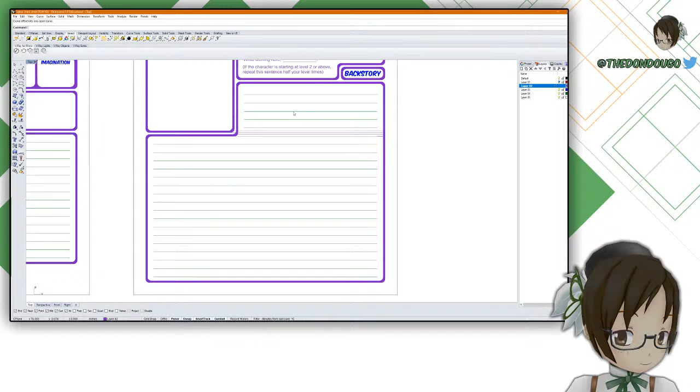0.06 inches. Okay, then we have area for notes, and then we have our powers, continued. Cool, I think we're going to do that.

Wait, that's not right. We want to delete the ones in the middle. Trim these out. Then, at some point, these curves intersect. I don't remember where, so what we're going to do... fillet, fillet, fillet. That's all filleted. Redraw these lines. Join.

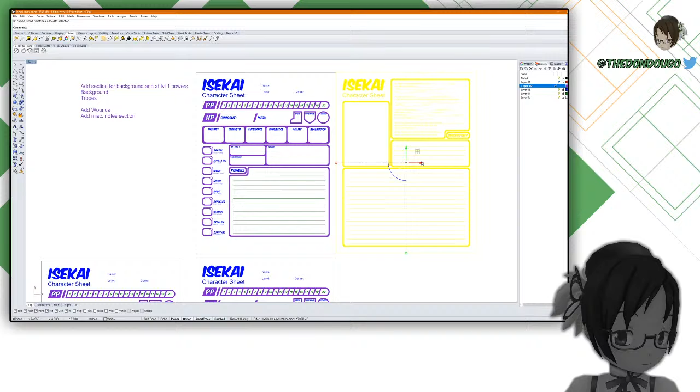One thing I'm just now noticing is, let's line these up. One sheet goes down further than the other. Like this here, there's a lot of foot room, which isn't the worst thing to have a large amount of room on the bottom of a sheet.

Let me see real quick, distance. 394. 394. We could... Cool, I think that's just the margin we're working with.

What we could do is bring this section down, have more room, or... no, if we have a little note section, it's going to be super skinny. Maybe that's not the worst thing, though, if we just want more notes.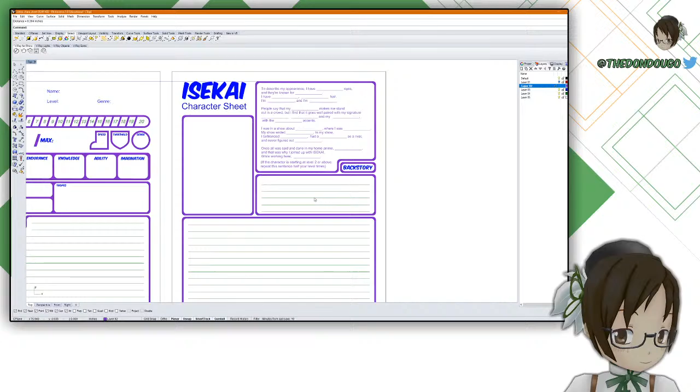Because one thing is, this inventory sheet doesn't actually have any extra room on it. If you have room to write your gold, your currency, you have room for all your starter items, but if you want anything else, then you don't really have much extra. So it could be nice to just have a few small boxes like this here, just miscellaneous room to write in. That's pretty nice, or here, it might be nice to have a little bit of room.

So I'm gonna see what that looks like. Go from here to... come on, give me something to snap to. Oh, is that just a hatch? There's no curve. Okay, in which case, if I bounding box the hatch, yeah, there we go.

What we're gonna do is fill in a box, this corner to this corner. Have a line. Move it here so that we can start offsetting it 0.6 at a time. That didn't actually line up, did it? This too. Is that not?

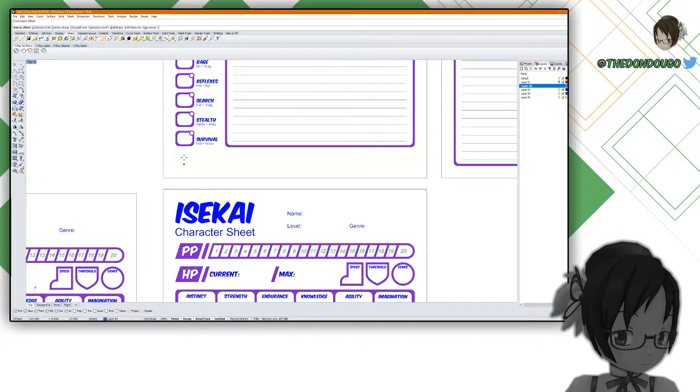Delete the curve, we just want the box. Fill it all the corners. Alright, then hatch. That's a pretty skinny little area there, though. I'm not sure I fully like that.

But what we can do is there is a little bit of a magic trick that I'll show you. What we can do is we can split our two curves with this one here, and then what happens is we can just scoot that on in. And then we can... okay, it won't let us join.

That's okay, what we do, we just trim those out, and then we can join. And then we can hatch. That looks a little better. Then it's all lined up with the majority of the body of the sheet.

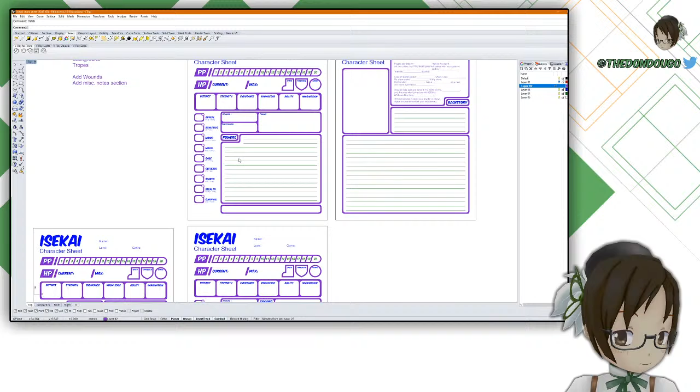I don't know what's going to go in here. Honestly, it might even just be better to... well, on the one hand, if we drag out the powers box, then there's this corner that's not really used. Whereas now what we have is it ends, but there's this really nice thing where it lines up. Apparently not perfectly, but it should line up there.

Given that it doesn't line up, maybe we could extend the box down a little lower, or just have some room on the bottom of the sheet. I think we'll keep the room on the bottom. It's a lot of time to keep designing things just to leave white space. As an RPG player myself, I've often used the margins to write in, so having larger margins on the bottom isn't necessarily bad. It's just more note space, but it doesn't get in the way of the aesthetics. That's how I'm going to justify that.

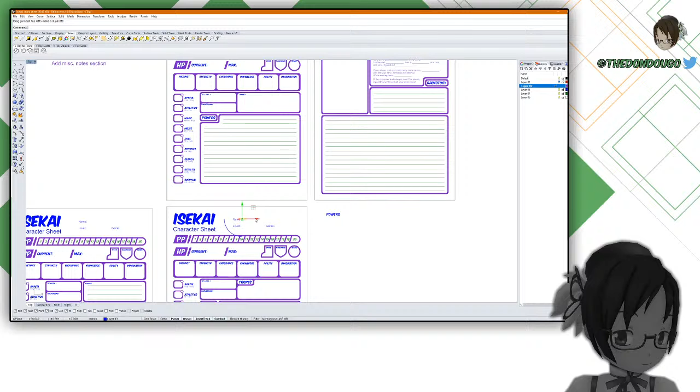So we have this sheet - well, not that one, this sheet, which is our new go-to. I'm going to copy this out here so I remember this is the new sheet. Then we have this here. Backstory, we need to add a thing that says powers. Coincidentally, we already have exactly that, although I don't think I'll do it the exact same way. What we'll do is delete that, and copy one of the small ones. There we go - little powers continued. Maybe add a period at the end. Yeah, I think that's nice.

We'll bounding box, offset for spacing, offset for the actual thing, and move this into position. Lines up with this corner. There we go.

Welcome back, Hukana. I don't know how much you exactly missed, but we decided that we're going to go with this for the character sheet. We're just going to keep some room on the bottom so that you can write in the margins, because I also like to write in the margins. So even though the bottom doesn't line up, it's not necessarily bad to have. And I guess there's also a lot of room in the header - you don't need all of this room to write that information.

But now we're back here. We're working on this box. Let's offset that for spacing, and that's where the other fill will go. Cool, so that gets closed. We're going to delete the hatch, and use this box to trim away the existing bits. There we go. Also going to use it to get rid of these lines for now - we'll work the exact spacing out later.

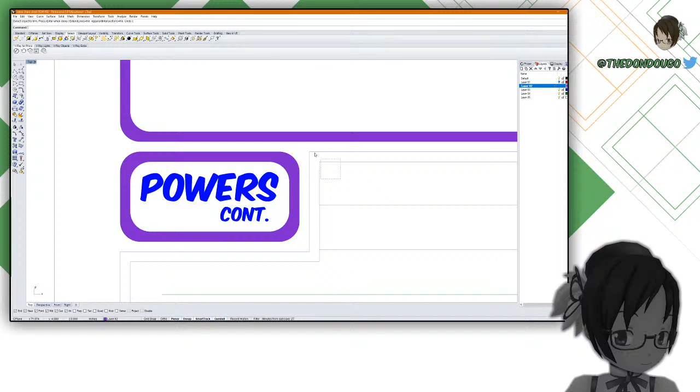Extend these lines out. Trim. Actually, I'm going to select all these lines, trim away the excess box, and that. Now we're going to join everything together, and then we're going to fillet.

Yeah, I guess all in all, this is a pretty good example of the things you can do in 3D modeling software that traditionally you don't think of. I used to do all this paperwork, basically designing character sheets, because I can CAD with the tools I have. Although then again, Rhino is a very good tool - it has all these different commands for splitting, intersecting, all that pizzazz. Whereas I don't know how many of these things are available in different modeling softwares. I know, for example, SketchUp, a very basic 3D modeling software, has none of these commands basically. It has some ways you can kind of do the same things, but maybe you can't do things as specifically.

Alright, so we have powers continued. Then we have this little section, which I was thinking would be just notes, bonus writing space. I'm not really sure the best way to say, hey, this is extra writing space if you need to write anything. I guess I could do what I have here, where we have the small text just up in the corner. I could put text up in the corner here, just like, notes. I think I'm going to do that.

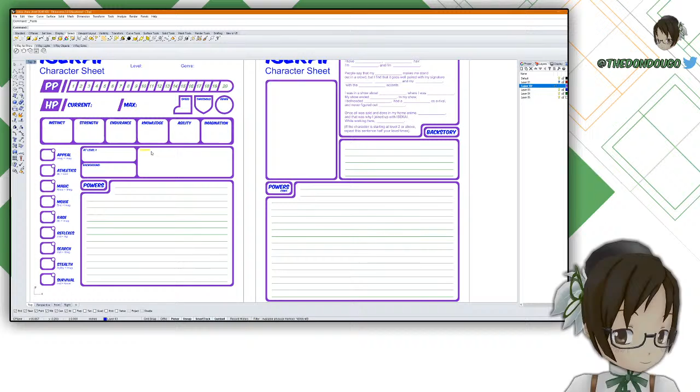Bounding box, offset that - that's the spacing around the text. Move this from here, get the smart track, and there we go.

Ah, I made a mistake. I made quite the mistake - I didn't change the text. And in Rhino, when you use the text, it centers it, it's not justified left or right. So trope should be notes. Yeah, which is slightly shorter. Just have to double check.

Bounding box, offset. And this time, move, get the thing to snap to that point - you can tell because it leaves behind that little gray icon that looks like the same thing you select with, but it's gray. And then delete that, and there we go. We have just a little notes section if you need to write anything.

That's pretty nice. I think what I want to do is just see what this looks like when printed out. Just this right here, we're going to center our view on that. We're going to hit print and change the scale. I just like to use my scroll wheel on the mouse for that.

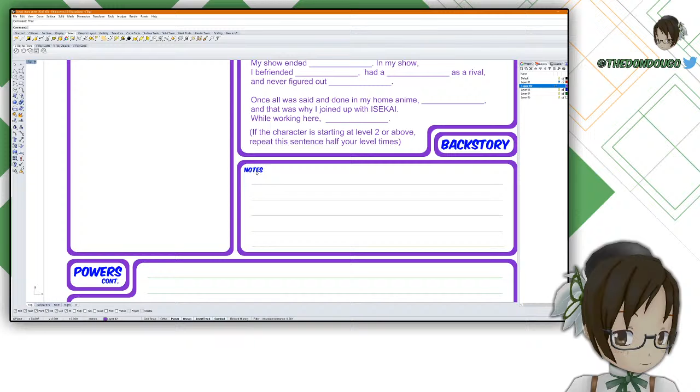Okay, so all the outlines are in gray, same with the backstory text. But now our notes are nice and dark, but still small and not too obtrusive. It should still be legible at the scale of the entire sheet. I don't exactly know how many points that would be, like if that's the equivalent of a 12-point font. It's the equivalent of this up here.

So next thing, we have a lot of these underlined areas which I don't know if I want to do much with. What I do want to do eventually is adjust some things. Actually, you know what, no. I was just saying how I wouldn't do this, but I think we're going to go ahead and get a start on it. Say, table 1. Go ahead and scale this down.

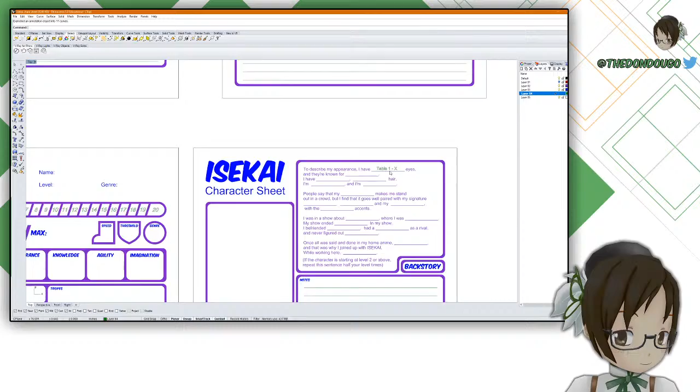So this is our green layer, which is the light gray, which means when it's printed it's easy to see what it says, and it's easy to write over it and still read what you've written, especially if it isn't hatched in but instead exploded into curves, which makes it super light. It's what we use up here on the protagonist point bar. It's also what we use in the inventory — actually in the inventory we just use text, we don't even explode it.

Okay, so in that case I've already lost where I've been working. What was I working on? Up here — I might just keep that text if I can get away with doing that. It also means if I need to change anything, it's super easy to. Now we just got to copy everything.

So table, okay, first thing is table 2 colors, table 3 eye descriptors. What I'll actually do is copy this, go back to Rhino, text, put all this again, and for height, instead of 3 inches, we're going to say 0.1 inches, because I'm pretty sure height is just of each line. There we go, now we have something to reference.

So first thing is this — I'm going to lock it, which means now I can't accidentally select it or anything. If I hit undo, that works, I was trying to hit the unlock. Yeah, so now we won't accidentally select this text. And then once we do this, I'm going to save it.

I'll print it out later, and maybe I'll come back to this off-stream, because most of the work on this project happens off-stream. On the one hand, I was thinking that after this we'd maybe design some items, but honestly, Kukuno, I want to draw you as the gelatinous cube. That's what we're doing next.

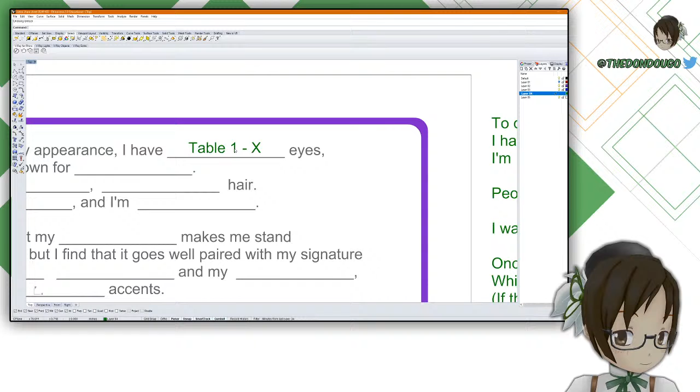Table 2 is color. Oh, it did justify left that time — interesting. I want to make this smaller then. Accidentally made a copy of it. There we go.

I said I'd do it, it was just a matter of when I had time. And that might only take, I don't know, an hour.

Eye descriptor — is that it? Eye descriptions.

Howdy, Yosei. Oh man, why did my name show up as orange in the chat? Can you at people on YouTube? Is that how it works?

Table 2 color. Oh, table 2 color again. Or is it just, when you say like 'Dondougo,' it's like that's the person streaming, so we'll make it highlighted. I don't know much about the streaming platform I'm on, I just know that it generally works.

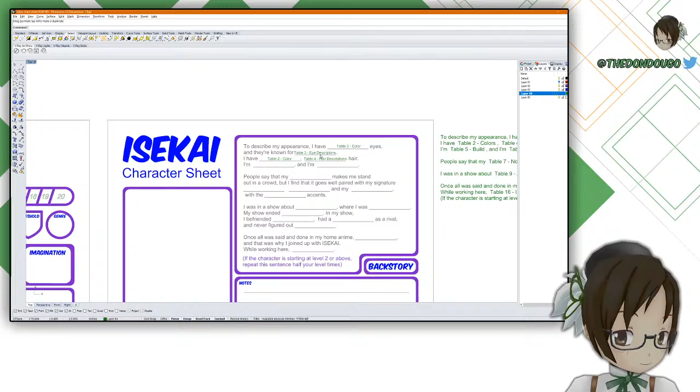That's fine. I'm on table 5 build, table 6 height. Was it table 5 build and then 6 height?

I think it was, yeah. But today we've just been working on some iterations on this character sheet. So the final one we've settled on for the main sheet looks like this. We just added some extra boxes, did some adjustments, and now we're working on this other side that has the very Mad Libs-esque...

character description, because it includes what you look like, which is these first 2 paragraphs. The third paragraph is about the show you are in, because the RPG is based around characters who were characters in anime. Their shows ended, and then they go and help fix currently airing shows. So that's what this one is, the what was their show like, and then the final one is what's happened since you've started going in and fixing shows for the Isekai organization, which stands for Inter-Series Expedition to Keep Anime Interesting. Isekai.

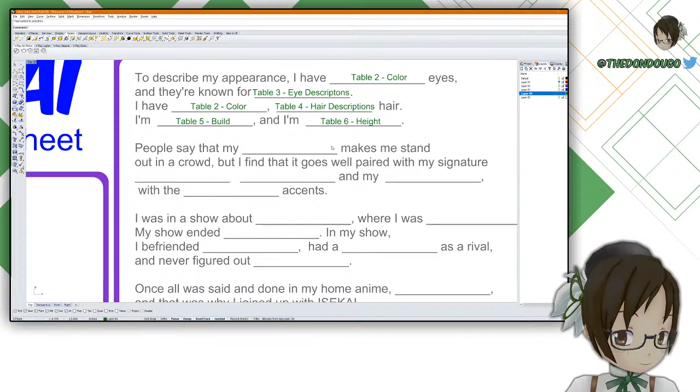Cool. And I know the character sheet, character generator, that's been my specific domain. Also like making the items. I'm gonna copy these for the sake of having correctly spaced words, or correctly spaced lines. I can just...

People say that my table 7 is noteworthy trait.

Yeah, it took a while. That was one of the things that my friend and I were like walking back to campus at like, geez, really late after getting food at midnight. And it was lightly snowing, it was real chilly, and we were just spitballing about the game still.

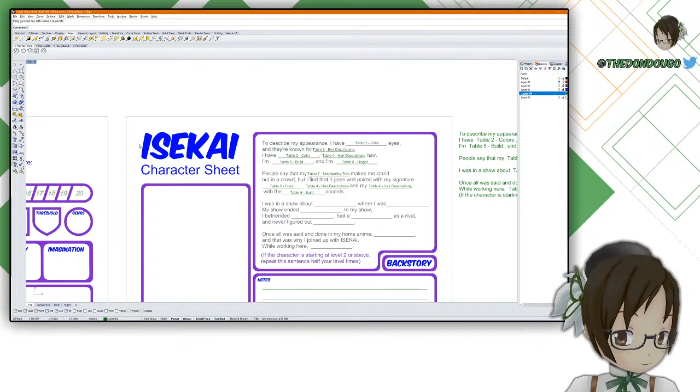And man, there were some really bad acronyms at the start. I think some were like, we tried just straight up 'anime.' There's also 'senpai,' which I'm glad we didn't go with, because that was exceptionally cursed. But Isekai, I mean, the acronym works well, and the very idea of isekai as a genre where you're going into other worlds that don't belong, that works well for the entire concept of the game as well. Plus it's a very anime word. And when we were planning out this system, that was like 2 years ago, there was a lot of isekai. That was still when Konosuba was pretty new, things like that.

My signature color. Okay, that's clothing, color. Which one's color or clothing? Clothing is... oh lordy, table 8 is clothing.

Then this is also clothing.

I know, like, another thing I have is, if you've seen any of my YouTube videos where I mention a Discord bot, you'll actually notice that the bot is called Loremaster and its icon is for the Isekai RPG. It's because for this system, I built a Discord bot. And I've been hijacking it whenever I need a Discord bot for anything else.